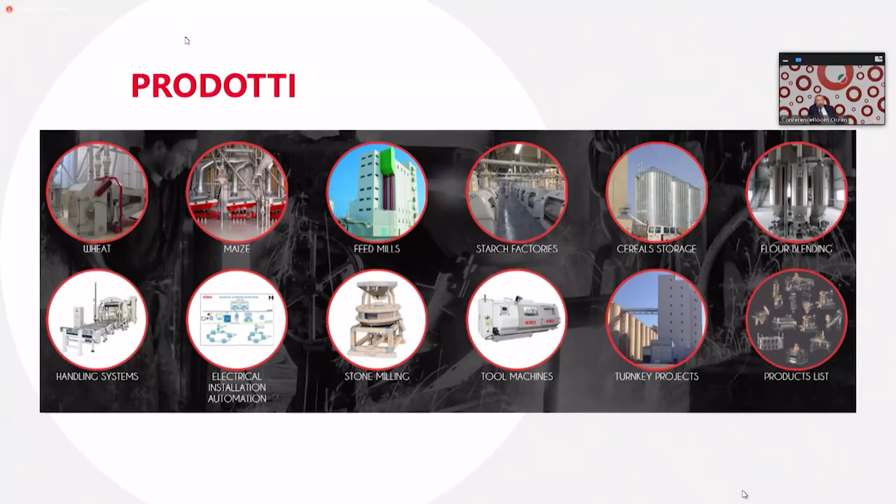Okay, let me now talk about Superior. Superior as a mill was created around the 1950s. The reason was rebuilding and re-engineering all the mills that had been totally or partially destroyed by the bombings in the Second World War. Ocrim used to receive at that time plenty of requests from all over the world, Italy first, followed by the rest of the countries. People wanted to have machines and mills very quickly because the world badly needed to give food to the population, especially Italy, which was heavily involved and damaged in the war.

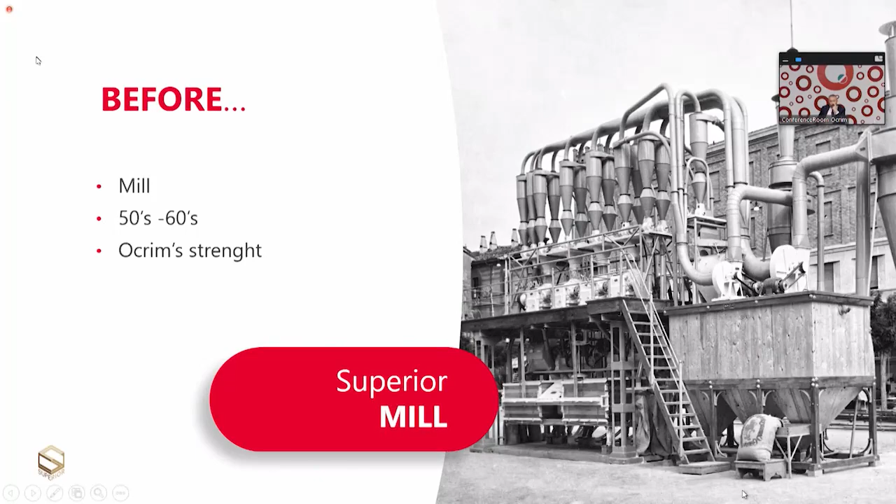We created different Superior machines, different capacities for wheat and maize, and the capacity changed depending on the number of machines required. What was very special is that you can see we have basically two different floors. Maybe the only weakness, besides the short delivery and installation times, was the energy consumption. Compared with a traditional multi-story mill, it was impossible to take advantage of the fall of the product, so it took plenty of energy to operate it. But at that time, energy efficiency was not an issue like it is today.

The project lasted around 20 years. It was a huge success for Ocrim because, once again, it was for the wheat industry, and the product was highly demanded by Central and South American countries. I know some Superiors are still being operated in those countries. At the end of that epoch, Ocrim stepped further into the milling industry, and then in the 80s and 90s we received requests for similar products, but those products were different because meanwhile the world had changed. All of this came from markets where government-controlled companies were replaced by privately owned organizations - that was the start of the privatization wave of the milling industry in Northern Africa and Eastern Europe.

Those countries wanted to make an investment, but there was not much money for traditional mills, so they were looking for products that were able to really create the business. Ocrim created this compact MCA milling unit that you can see here. There were basically 4 different systems inside which we fit machines. There was just one single size - we made basically just one type of flour, just one byproduct.

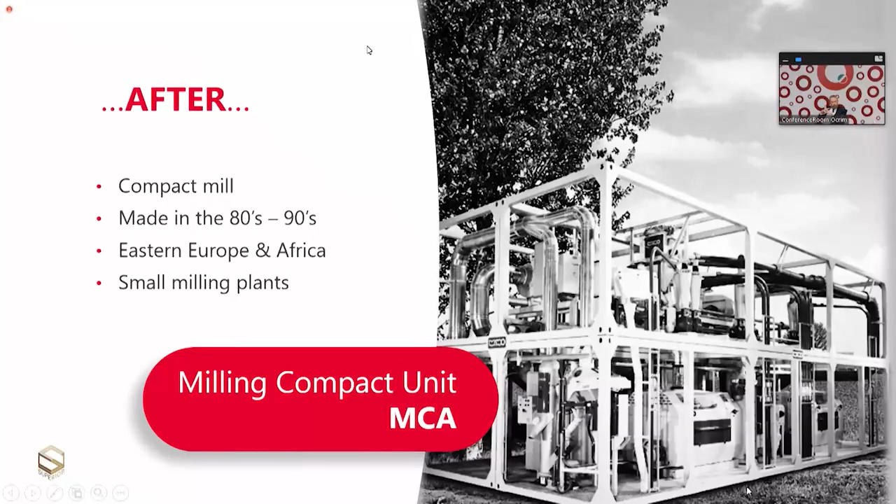This was also quite successful, maybe not as successful as the Superior 30 years earlier, but I have to say we still have some units like this around the world, still being operated. Some Ocrim customers, thanks to this milling system, were able to become bigger and bigger, and now they are large flour producers.

Of course the market has changed - it keeps changing, it is now remarkably different. People are asking for different products, and needs are different as well. But today we have plenty of mills with large capacities, while we still have market niches that are very strong and powerful, and of course they require small quantities of cereals to be processed. So once again, what they need is highly flexible mills. This is what Ocrim did to make those customers happy.

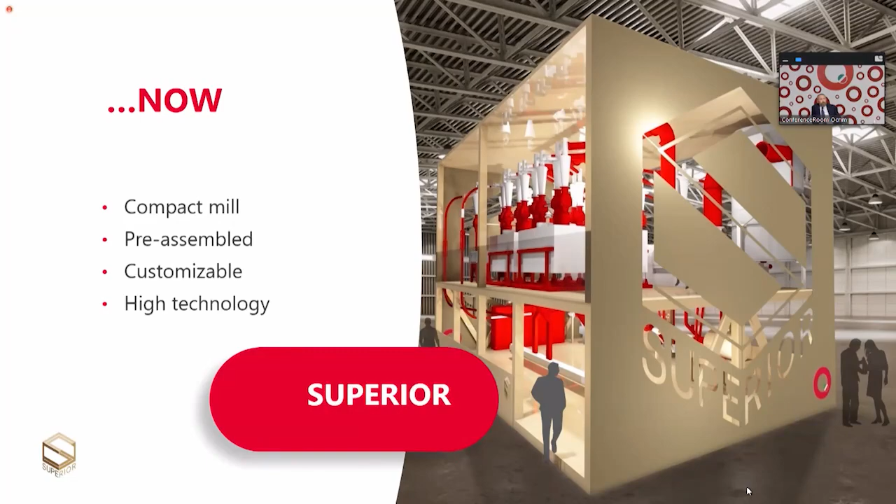We reused the name Superior. This name and even this logo was the very first big success from Ocrim. As you can see, Superior is back, but with a new concept, with today's technology. All of these technologies are different versus those we used decades ago, but this is something we are not necessarily applying on traditional mills.

Okay, you've seen the logo - it's basically a cube. You can see the S for Superior. The color is gold - I think the most beautiful, most precious color. We thought of a cube because a cube is a perfect geometrical object, clear, crystal clear, very accurate, precise. Once again, a cube is a cube, and it cannot be different.

In the next slide, there's a rendered image showing you the Superior. Is this the typical product? No, because there's a difference between the Superior and, let's say, accessories and machines put together. Making this sort of fitted unit is very simple.

Here, the concept is totally different. This is not just an assembled product. You can also have machines and accessories that may be unique. By the way, I'm inviting you to visit the Ocrim milling production facility to really see what we make. So this is the rendered image.

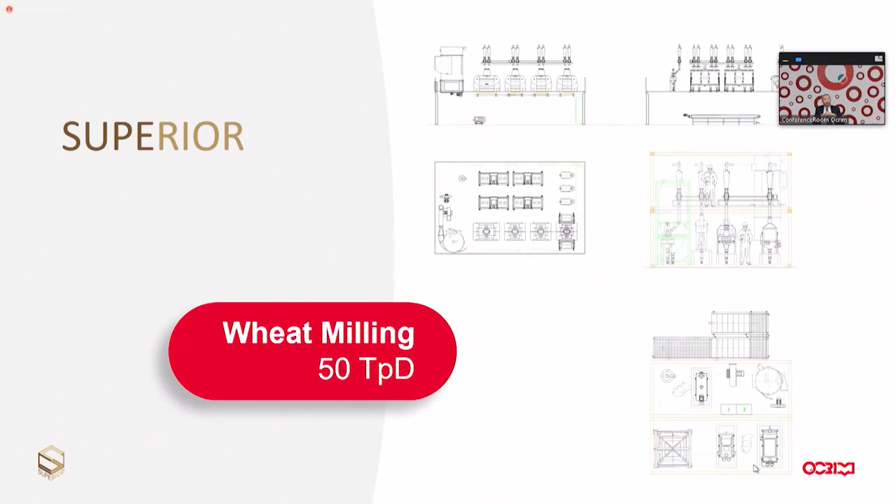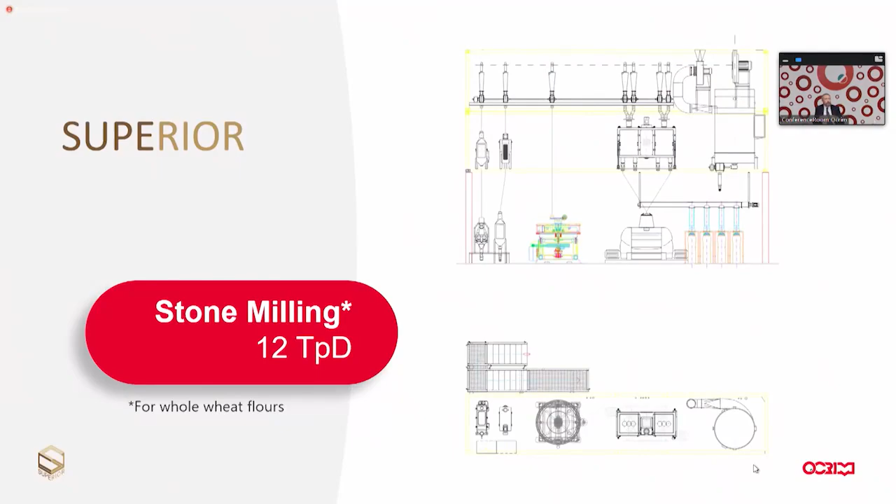Now let me share with you a quick overview of some features of the 50 TPD wheat milling units. As for the maize, we have more or less the same solution, 50 tons per day. Stone milling, 12 tons per day. You can see they look different in terms of spaces and sizes. The reason is it depends on the type of process and even the type of cereal you want to process or mill. You don't have exactly the same needs between wheat and corn, and if you work with a traditional mill, the process is different, so spaces or sizes are definitely different.

Now let me dive a little deeper into the benefits and advantages of Superior. I think the key benefit, I will walk you through all of them, this is just a general presentation. We have a small investment, easy management of the plant, easy installation. As I said before, the system is highly customizable, and this is the greatest strength of the machine. It is highly energy efficient, also in terms of technology, and it helps you save time.

Of course, we will offer training and education to the milling plant operators. This has always been one of the key strengths for Ocrim. And then, of course, the automation that we have implemented now is absolutely fundamental if you really want to have a top-level, top-notch milling plant. So let's go through every single point.

A small investment, why? Well, for the reasons you can see here in the list. First and foremost, the Superior doesn't need to have the typical multi-story building. So today, you don't have to have 3, 4, 5, even more floors. No way. Today, you just have to have an industrial shed.

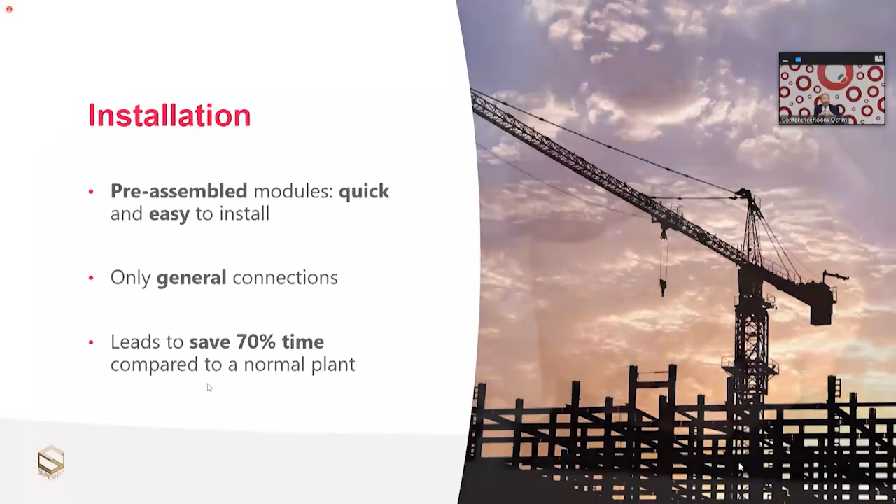Now, on-site, I just have to make all of the connections of the blocks and the general connections, for example water and electricity. Then we have this very important point, which is customization. Once again, it's a crucial focal point, in my opinion.

Something that you cannot change inside the Superior is the applied technology, the milling technology. This is the real foundation in order to have a specific mill leading to specific results. Applied technology depends on all of our expertise, more than 80 years of building and marketing machines. Just imagine how much know-how and expertise we have from our plants all around the world. All of this has helped Ocrim grow, and it is still helping us make highly technological plants.

There is something we can definitely change or customize, so your machine will be your own customized machine. First and foremost, the color. It sounds simple, but it is not superficial. You can see here behind me the O's of Ocrim in red, our official color. But at the beginning of the presentation, or in the brochure, you see a different color. The Superior logo comes in a totally different color, because we need to recall a different concept. Every single customer wants a specific color, or more than one, maybe the color of their team. The color is a fundamental element when it comes to customizing this.

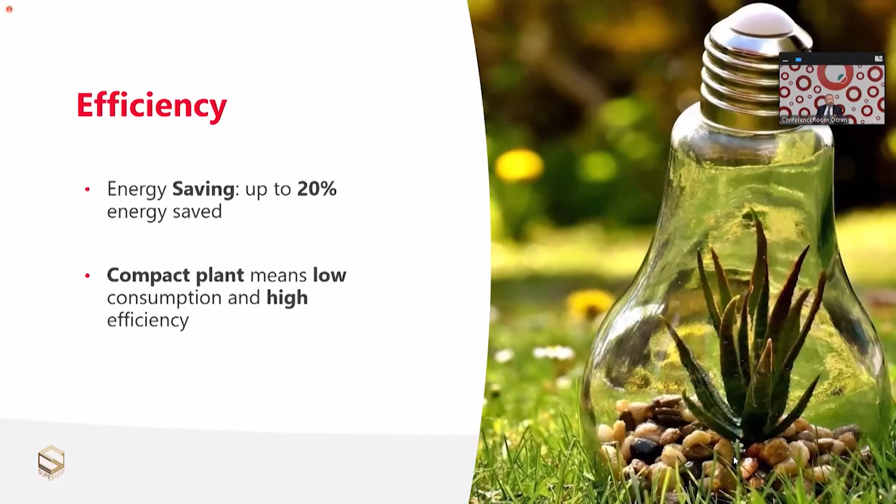The technology we have applied to this machine is cutting-edge technology, better than the previous technology. We also have another important factor: time. I'm not talking about installation time, but the supply chain of time—the time you save to operate the machine.

On the website, you can download plenty of information about this mill. Apart from the customizations and possible options you want to have, there will be plenty of information shared with you so that you can carry out specific actions before you receive the Superior.

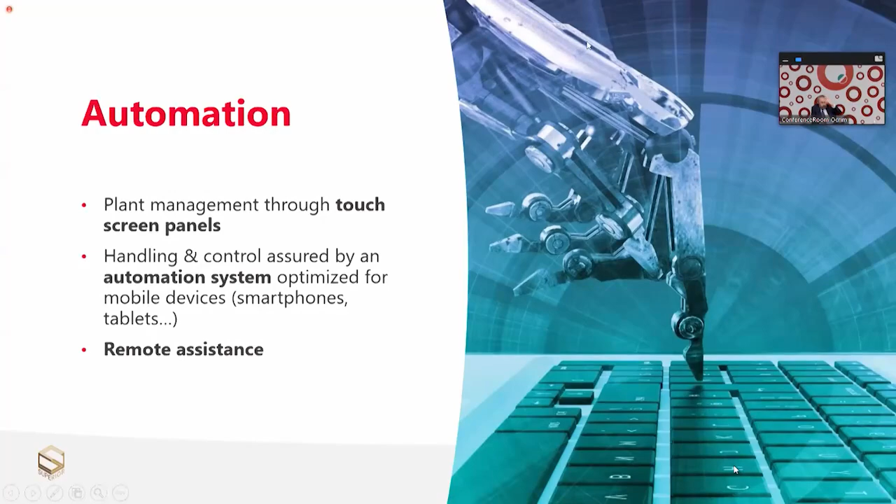In case of need, you also count on the remote service, so once again, a 24/7 teleservice.

So let me now show you our own choices. I'm talking about the technology and even the personalization, the customization. There is something that, of course, you cannot see right away, so you don't see what is at the core and the heart of the machine. Of course, you see the plant, you see the technology, and you can also imagine here the customization.

So we have basically 4 different versions for every kind of product, so wheat or corn or stone milling. Once again, all of this can go through plenty of changes. When I say customization, it's something absolutely unique for every single customer. It depends on the product you are processing.

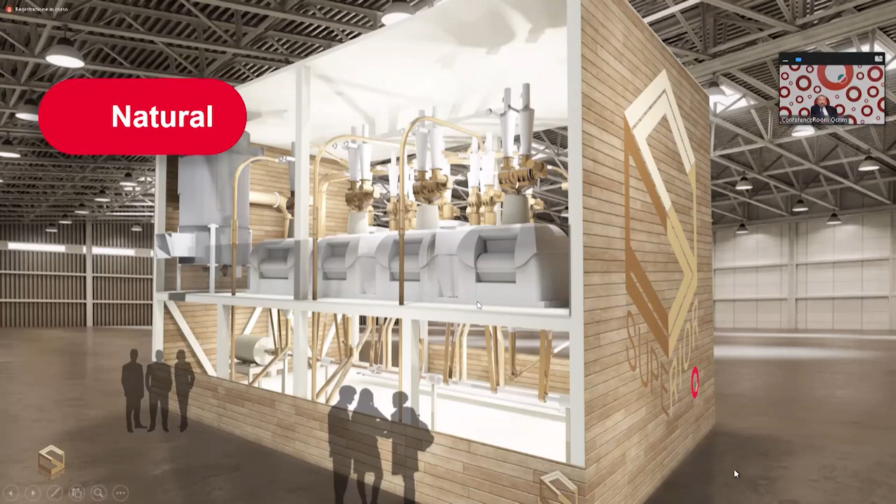On the two short sides, you can see the Superior logo. We also have a third version, which is the style. Let's say this is really eye-catching, very modern design, very sleek. So it is sort of a fashionable style.

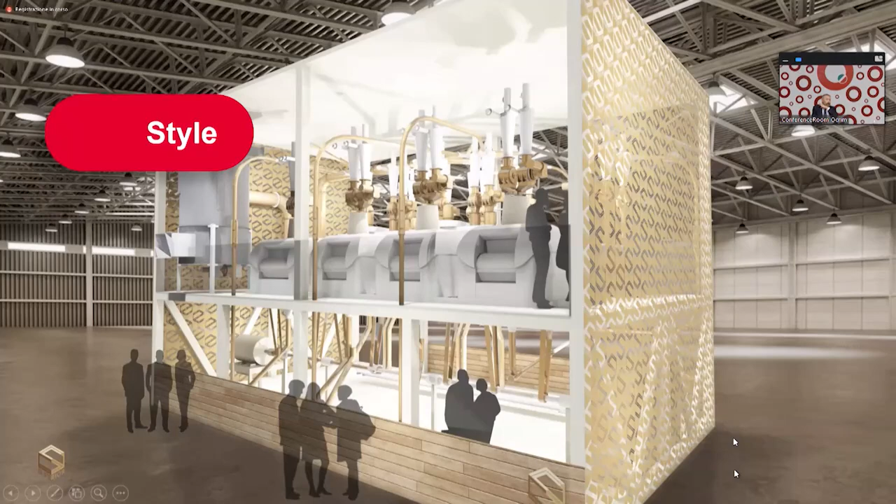It looks natural. You can see here the full height side wall. Once again, this is composite material, and we have printed the Superior logo full height. This is really, really eye-catching.

When I talked about customizations and colors and materials—materials are different here—I was not just saying this for the sake of it.

So this is the real object. You can see a rendered image here, a project, but anyway this is the real look of the plant. But once again, we can't say that this is totally assembled—it is a unique, custom-made plant.

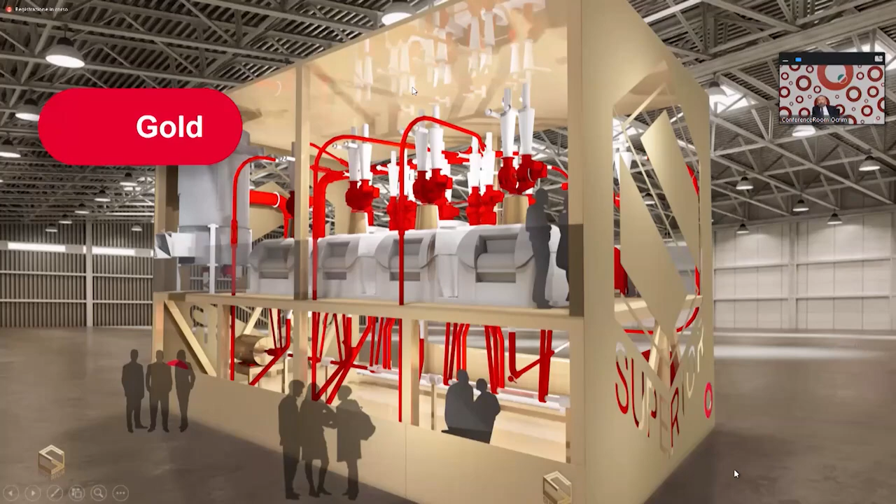And I think the name Superior is based on all the reasons I walked you through. This is my last point before giving the floor back to Anna. And by the way, Anna, thank you for listening to me.

So this is what we did—we have created a website dedicated to Superior. It deserves a website only and exclusively dedicated to it. Of course, there's a connection to the general Ocrim website. This is the homepage.

On the internet, www.ocrimsuperior.com. So once again, if you download this material and click on the website, you will find information. In the next days or so, it will be completed with plenty of new pieces of information.

So once again, let me summarize the key points: a small investment, limited investment, fast ROI (return on investment), shipping and assembly time are very short, high efficiency, energy saving—also in terms of energy consumption we made steps forward—and a low level of maintenance.